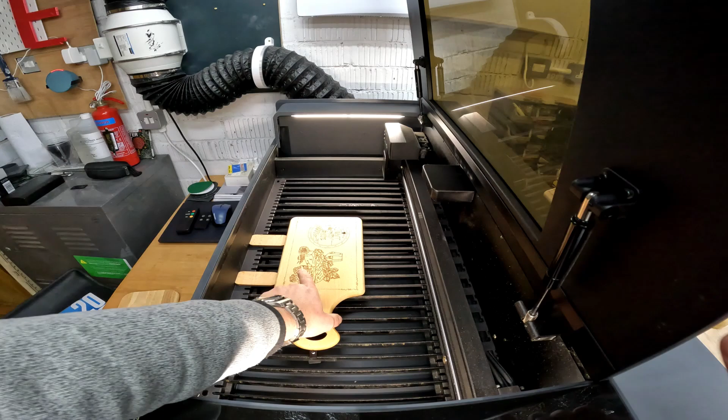Great. It's another cheese board finished for another customer. Don't worry, brie happy. Yeah, sounds good to me. Nice bit of brie.

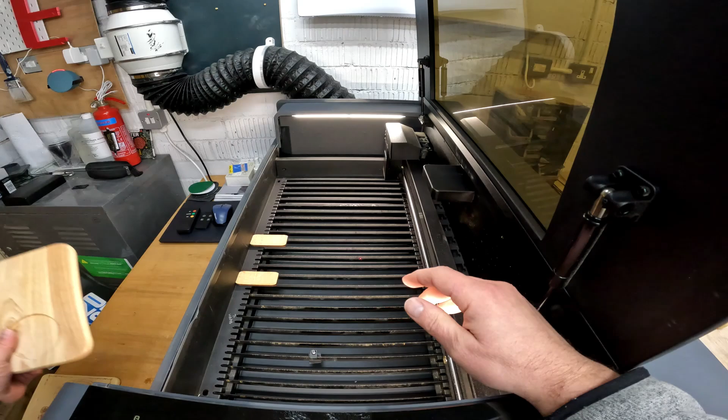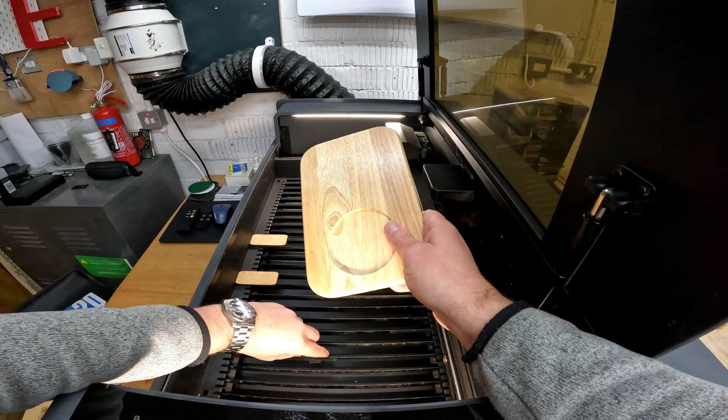Right, well now I've got about 6 of these to do. They're all exactly the same. The only problem is, every time I place them in, I can never put them in exactly the same place. The little clips that come from XTool, using the slats, aren't really designed to position things, they're more to hold things down when you're cutting them. And these little wooden pieces I cut out are okay for spacing, but again, no good for repeatability.

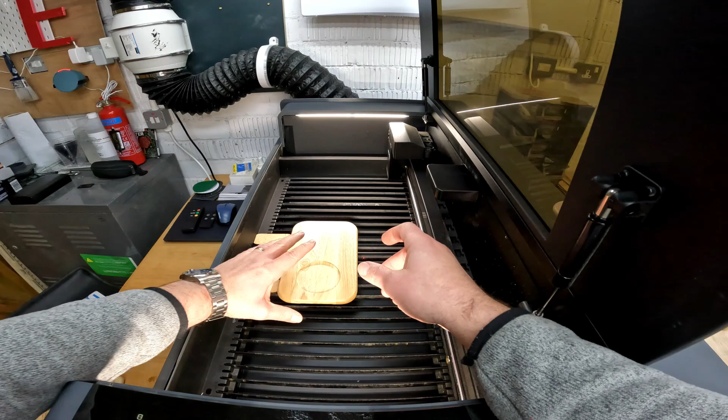So what I need to do is create something where I can put this in exactly the same position each time, so I don't need to realign the image for every single board that I'm engraving. So it'd be pretty cool if we could maybe design something in CAD, 3D print it, and then we could slot it in either between the slats or on top of the slats to align the block in the X and the Y axis, so we've got a repeatable position, so we only need to set it once, as opposed to multiple times that I'll have to do today.

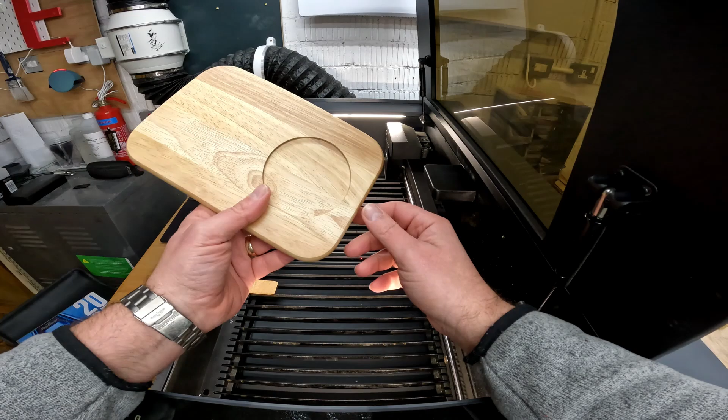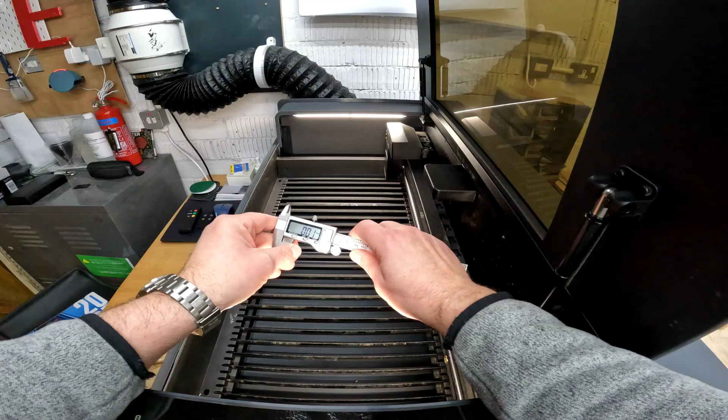So maybe I'll pause for a little bit in laser engraving and do a bit of CAD, but first I suppose I need to make some measurements. Right, okay, cool. So I've got my calipers. So how wide are these slats? Because I'd want something that sits over the top of these. Okay, so 5mm. Cool.

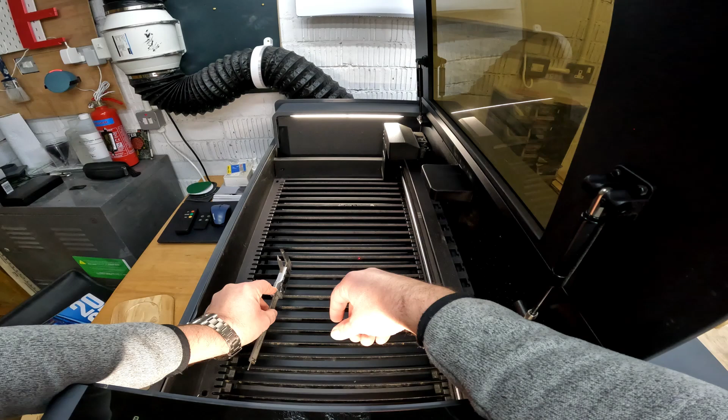Then the gap in between is, let's see, not very good for the camera. What's the gap in between? Oh, there we go. Gap in between is 20, 21. Oh, hang on. Oh, it's about 21.5.

So if we make something that's 21.5 that drops down between the slats, and then maybe spans 3 of the slats, so we've got something that we can butt up against that's not going to move, that's not going to wibble around, and then maybe something that we can put in this axis as well, so we can set the X and Y position of the board.

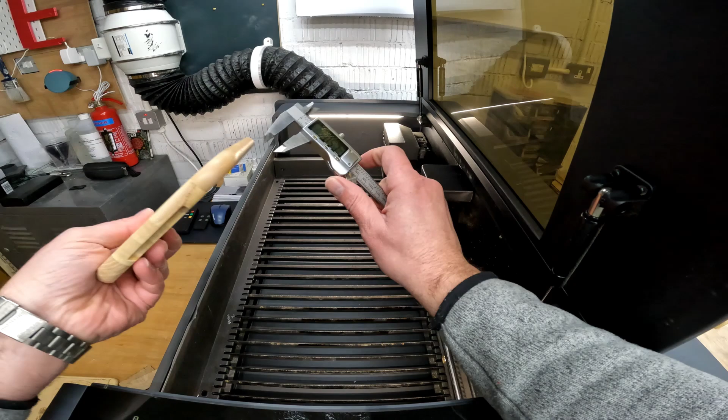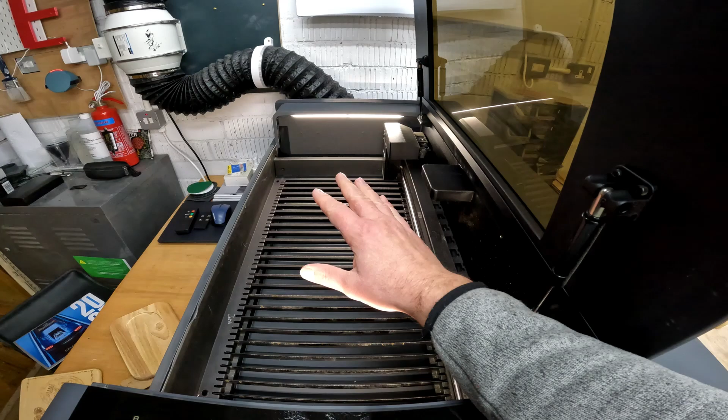So most of the boards that I make are around about 15mm. What's this one? So, yeah, 15.5. And this one, yeah, 15. So it's around about 15mm. So I want to be able to leave them in place, so it has to be lower than 15mm. I guess we'll give it a go and see what we can make.

Okay, so let's see if we can design something to make the process a little bit more repeatable, then when we do multiple boards, we can get everything lined up. So first thing, I'll make some sort of block for X alignment. I use Onshape to do my 3D CAD. One, because it's easy. Two, it's free. And then I use that with a Bambu Lab 3D printer. So you can see some of the things I've made in the past to aid the ventilation on the XTool laser cutter. So I'll create a new design in here.

And this isn't a how-to guide for Onshape. This is just the tool that I use, and there's probably better ways to do this. So let's go X axis alignment block. Okay. Right, so we've got the measurements. I think it was 5mm for the width of the slats. The gap between the slats is 21.5mm. So let's just make a simple block. I guess we want it to be fairly rigid, so if it can go into at least 2 of the gaps, then that'll remove its propensity to move around and wobble, because again we want repeatability.

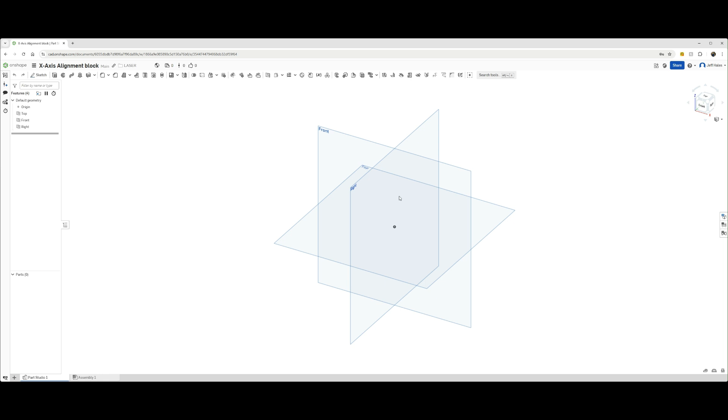So I'll create a sketch. I'll do it top down so it's easy for you to see what I'm doing. So we'll start off first and just create a rectangle. Now, a lot of the boards that I make are about 15mm high, so I don't want this to stand proud of the board. And maybe if we make it half the height of the board, that'll probably work pretty well. So we'll do it at 7.5mm high, and then it's 5mm for the slats, 21.5mm between the slats.

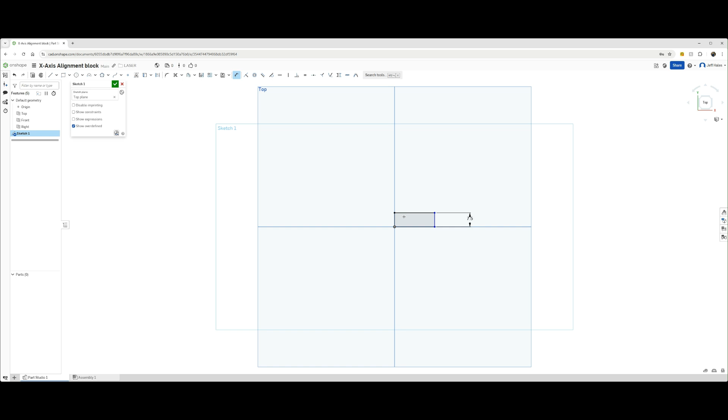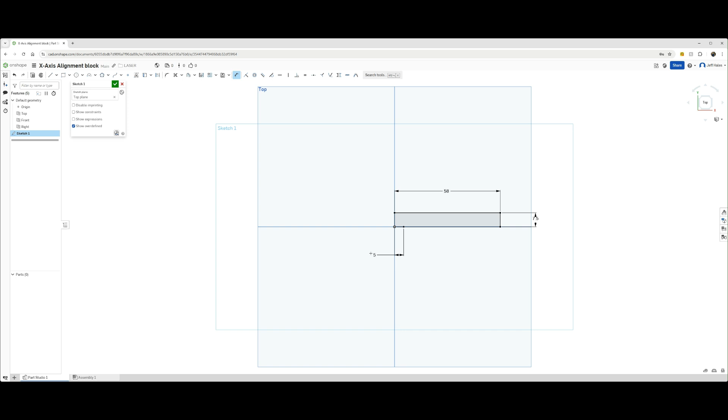So maybe if we do an overhang on either side of where it drops into the gap, so it'll be spanning 3 slats and then 2 legs, so 21.5 twice and 3 fives, so 58mm. Yeah, 58mm wide. Cool. Right, so just do a construction line now, and that'll be 5mm. So this will be where it overhangs. If you think about it, looking at it side on, this is where it overhangs the first slat by 5mm.

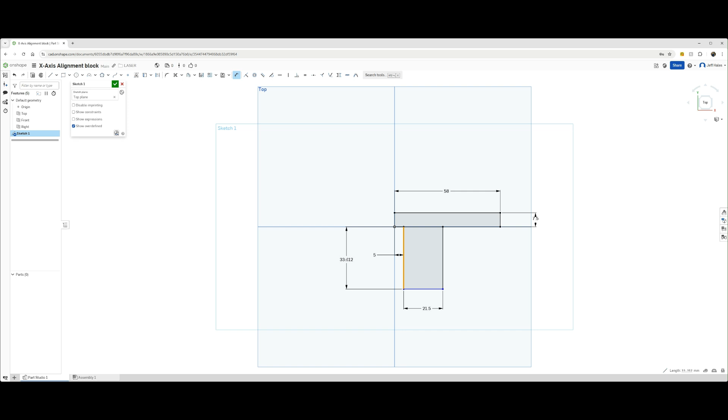Then have the leg that drops down between the slats. So that's obviously going to be 21.5mm. Want it to be nice and snug, no wobble about. And I guess we could do that 20mm, so 2 centimeters down. So that should give it some depth. I suppose it's just a little bit deeper than the slats.

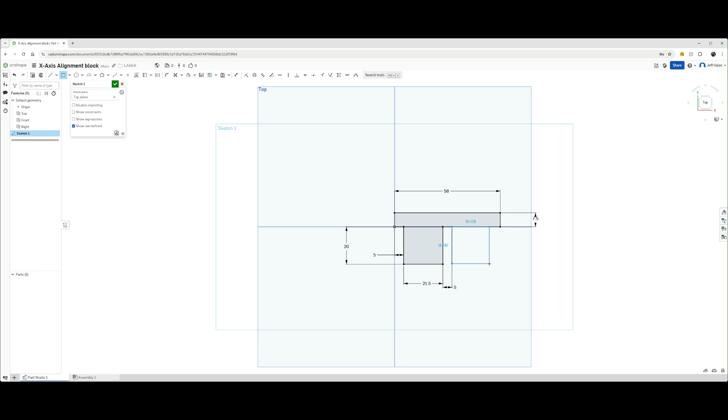And then we've got another construction line. It's another 5mm. And then we'll have another leg. That's 20. Oops. Dimension. It's 21.5 as well. Cool. And then hopefully, if we dimension this, yeah, that's 5mm. So it worked.

Okay, so I probably don't want to print this as a solid piece of plastic. It doesn't need to be particularly strong. It just needs to be rigid enough that it's not going to wobble about. And I don't want to use all of my 3D filament to print this, where it doesn't need any real structural strength. So I want to make this hollow.

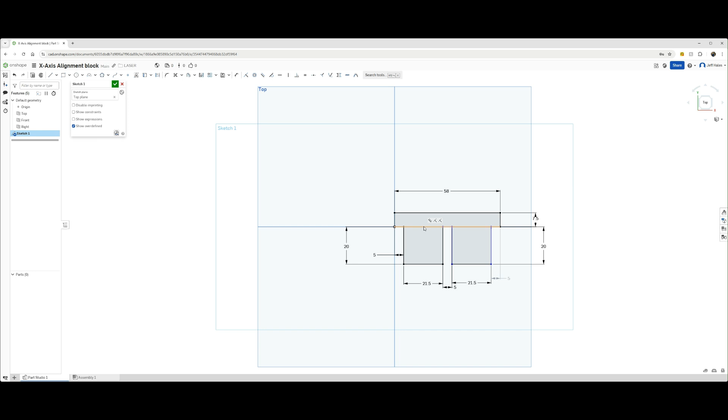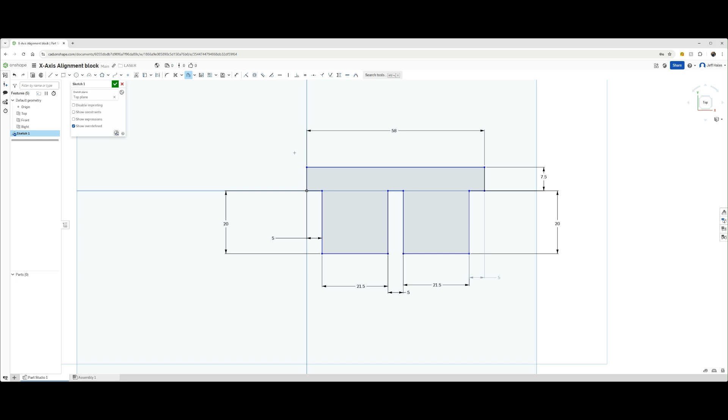So let's just remove some of these lines and tidy this up a little bit. Remove that as a construction line, make that a real line. Okay, so we can see now Onshape told us this is a contiguous line, so it showed up as a full object. Now what I want to do is go to the offset tool, highlight all of this, and I want to take that in 3mm.

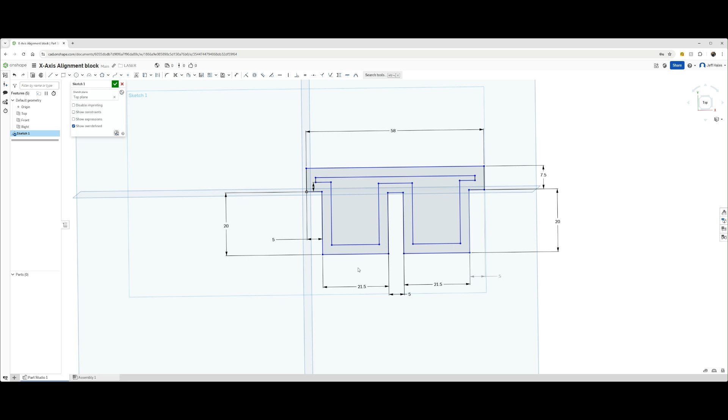Okay. So see what I'm doing here. I'm just making this a little bit hollow when I print it. So with 3D prints anyway, you get the perimeter, and then you get infill. You can get different infills. Normally I go for between 10 and 15% infill. But this way, I'm saving all this space here. So I think that looks good.

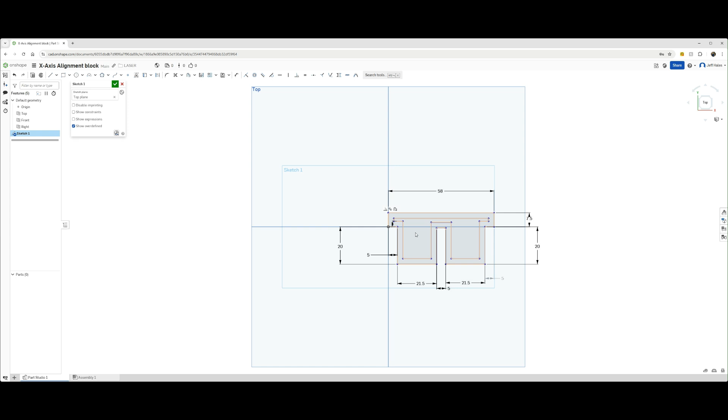What I want to do is just give it a little bit of strength. I'll do some internal fillets. 2mm internal fillets. I guess here as well. The edges of the slats at the top are pointed, so this shouldn't interfere. And then we'll do these bits as well. And I want to keep this face square. Okay, so that should do for the sketch.

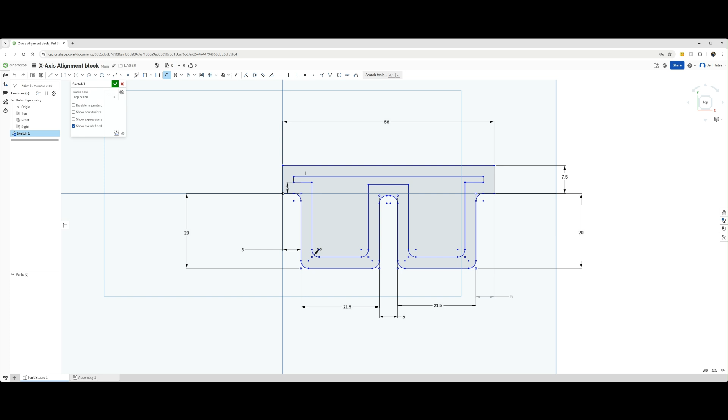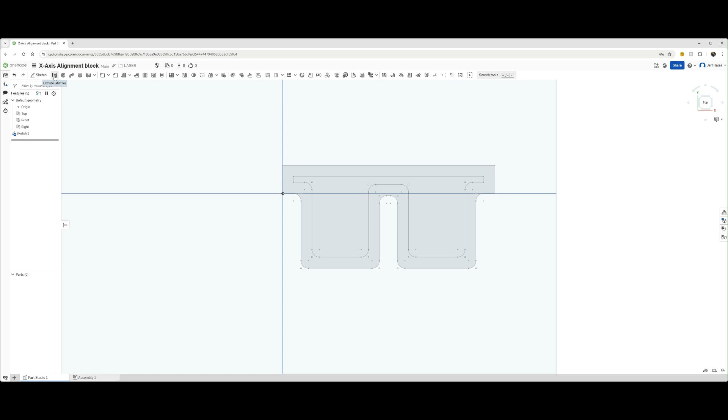And I guess now all I need to do is... actually, let's go back, just so it looks pleasing to the eye as well. Again, there's probably a better way to do this. Okay, cool. Right, so let's extrude it. We want it to be fairly chunky. We don't want things to wobble around on it. So let's do it as 5 centimeters, so extrude that by 50 millimeters.

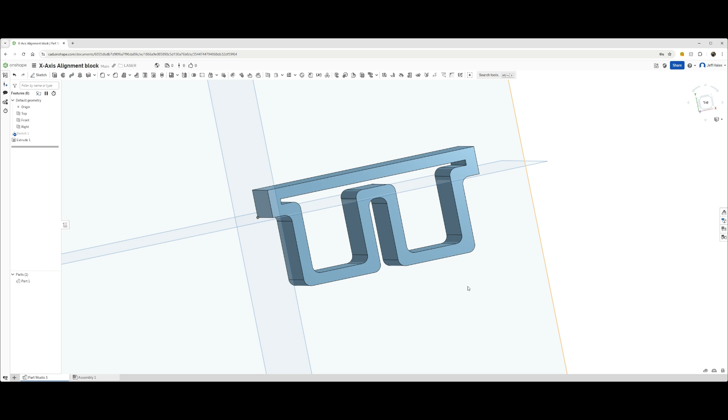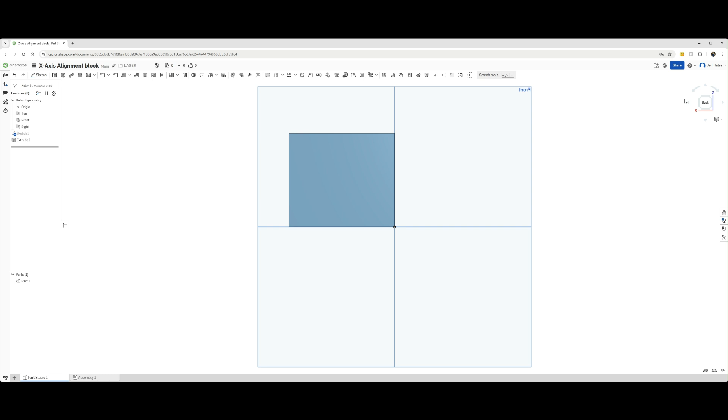Okay. So the idea is that this will just drop down into the slats, and then we've got a side there to reference off. And if I'm using this more than once, when I come back to it, I want to make sure that I'm always putting this block into the same gap. So I'll just put an arrow on this top face that I can then mark off on the laser, so I always put this block back in the same place.

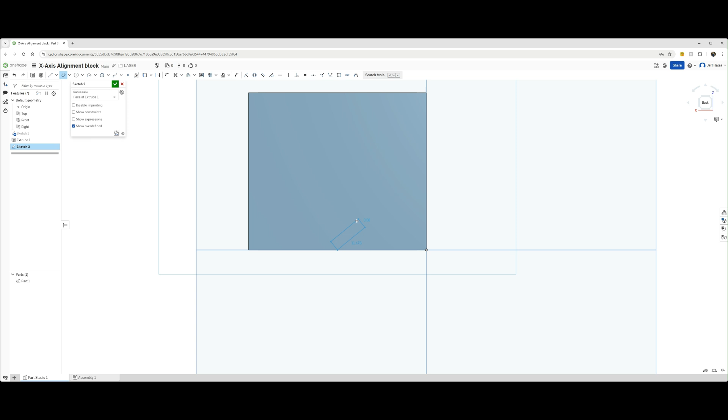So I create another sketch on the top, and we'll just make a little arrow. It's always good in Onshape that if you go along an edge, it'll show you where the center point is. There we go. And we can point the arrow there. So let's just dimension this. I guess 45 degrees. This is 2 millimeters, maybe. Yeah, nice.

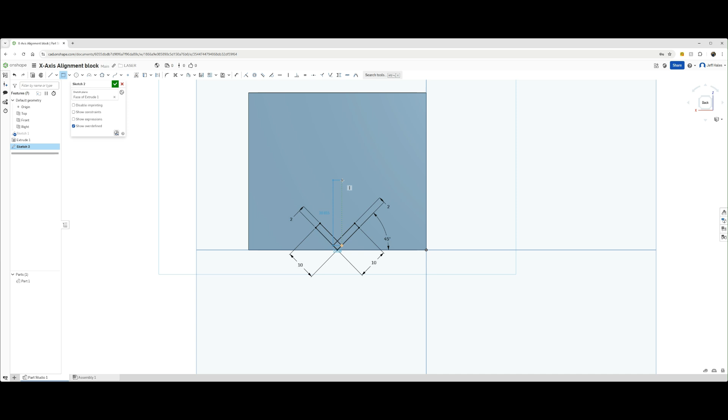Okay, create another one. This line. Oops, there we go. By 2. And I will just do an arrow there. Cool, that'll do. And now we'll just extrude that just a millimeter, I think. There we go. So I think that should do for the piece we want to make.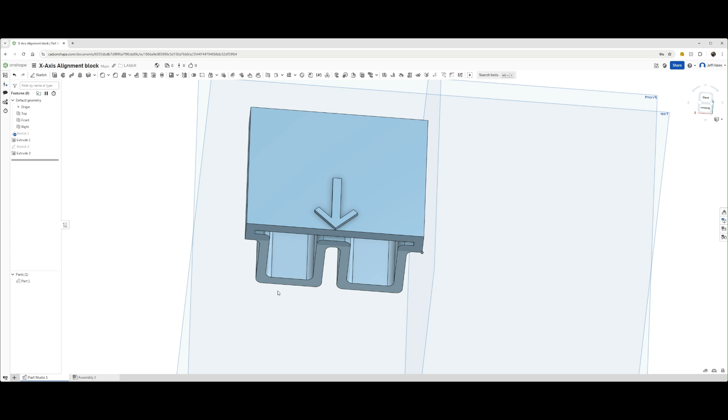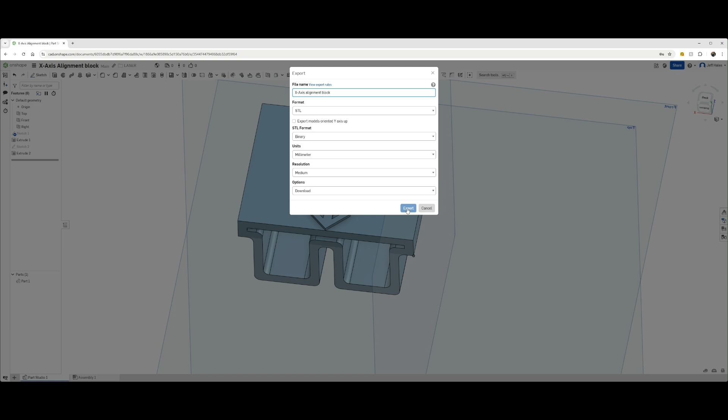Now, this will be good for the x-axis, but it'd probably be quite good if we can do something for the y-axis as well. So let's just export this, so I can put it into Bambu Lab later and print it out. So we'll call this the x-axis alignment block. Cool. Right, and now let's do a y-axis block.

Okay, so we've got the x-axis, let's make the y-axis. With the y-axis we want to make it wider and not as deep. So we probably want to make it at least twice as wide. In fact, yeah, we'll do twice as wide. So we'll make a copy of this one, so we're not starting from scratch again, and we'll just modify the x-axis.

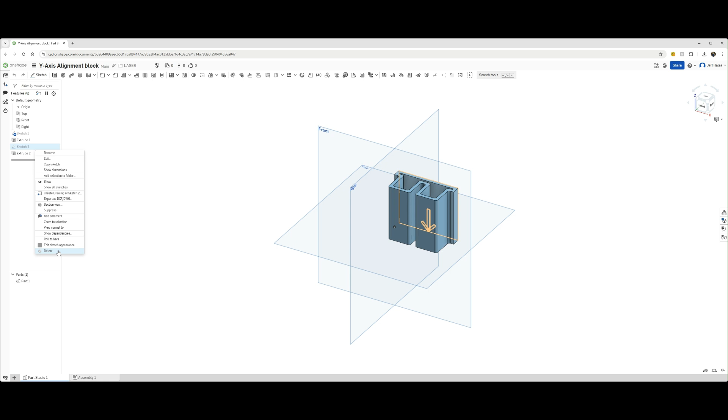Okay, so, okay, there we go. Right, okay, so let's modify this then. So probably need to do this. I'll edit this initial drawing. Now, how can we do this?

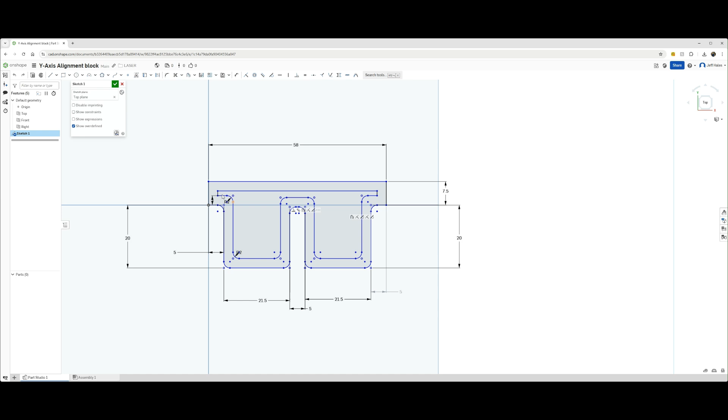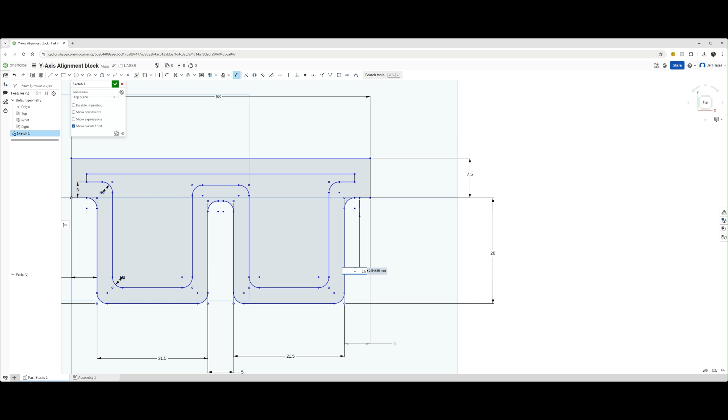Okay, so what we can do, we can mirror all of this and make it twice as wide. So that's fairly straightforward. So we've got 5 millimeter here overhang. So if we do a line, we'll take it. So if we make this 2.5 millimeters, that's cool. Now, what we need to do is mirror this. So we'll select the mirror line, which is here.

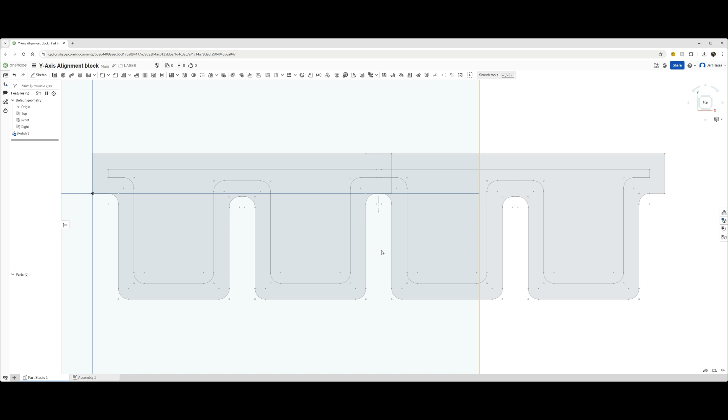Let's select all the pieces that we want to mirror. There we go. So we've now got one twice as wide, and all we need to do is a little bit of tidy up now. So we can get rid of this line, and we can just fill this in. So that should be it. We've got our, oh, hang on. Get rid of this line as well. Oh, we're done. Okay.

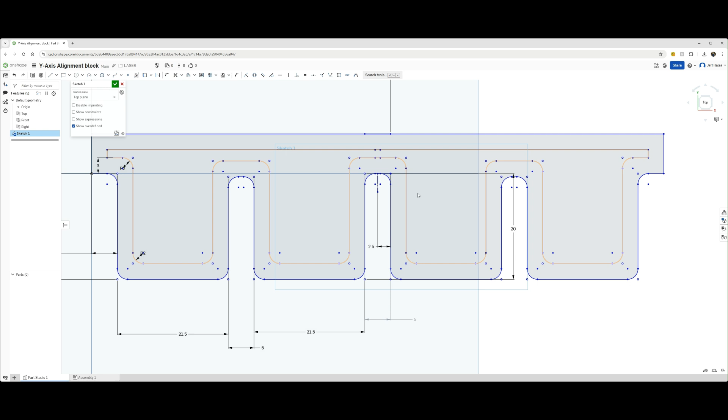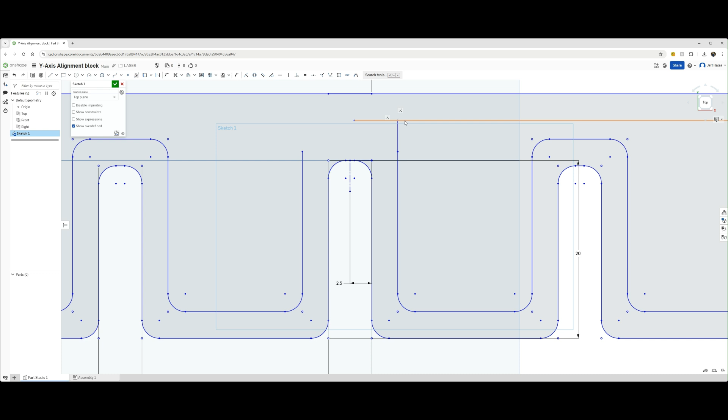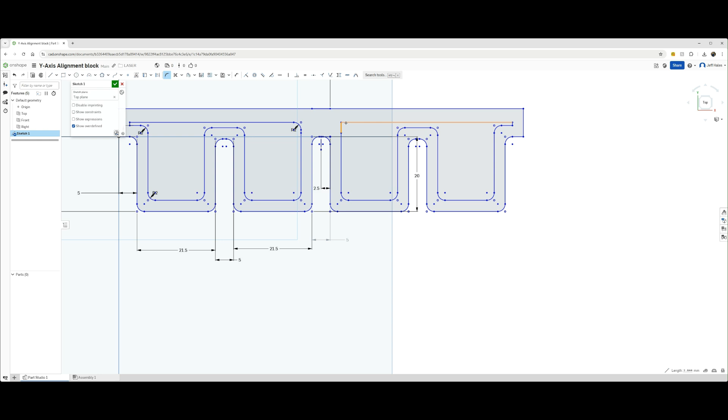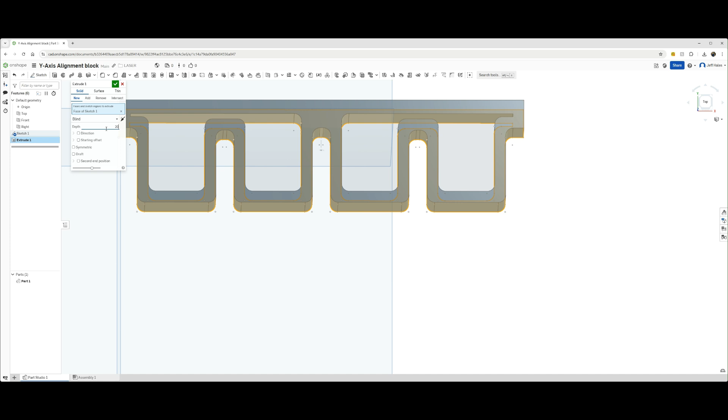So now we just need to extrude this. And again, we'll just do it at 20. Cool. Right, and let's do the same as what we did on the last one. I will just create an arrow on the top. So, new sketch, line, span the middle. There it is.

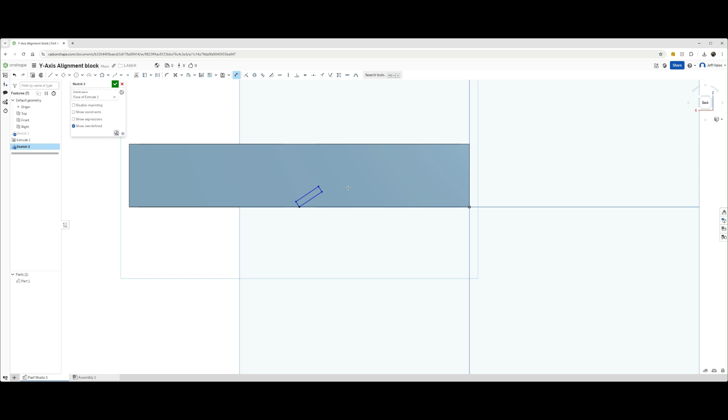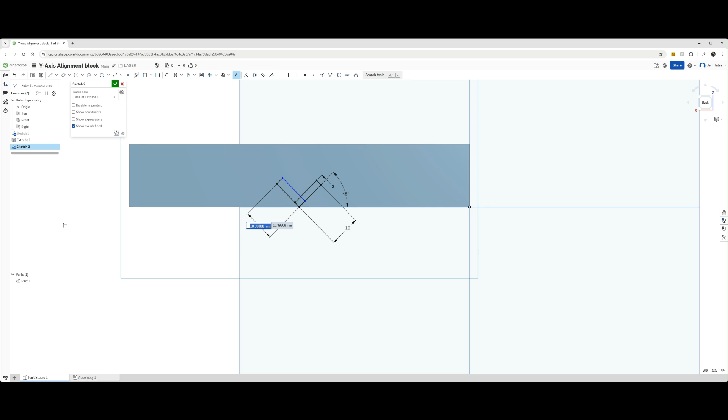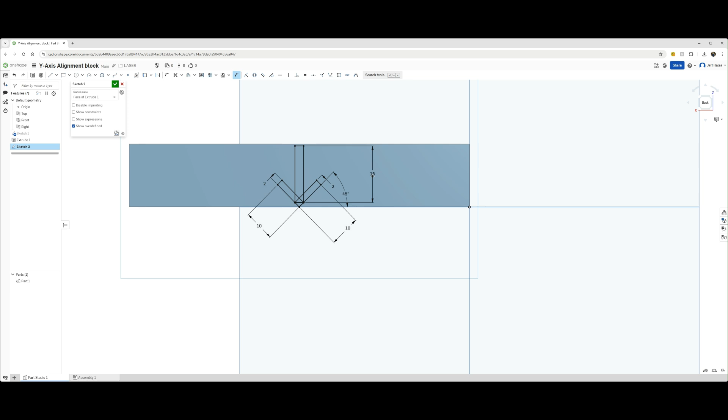Dimension it really quickly. 45, 10, 2, another one, same axis, go, 10, oops, 2. I'll just do, oops, there we are, just extrude that. Oops, easy. Okay, so that's the y-axis. So we'll just export that now.

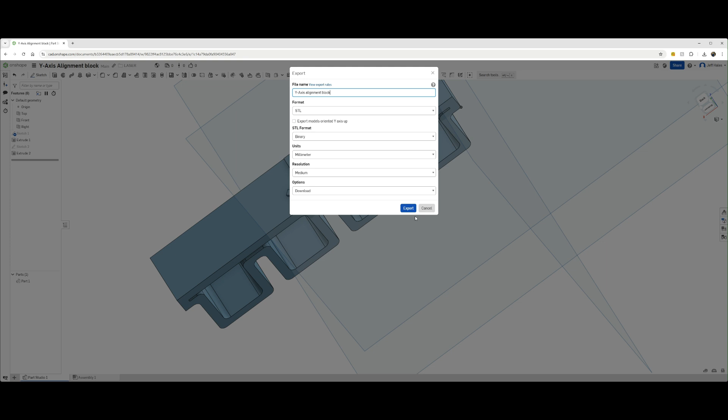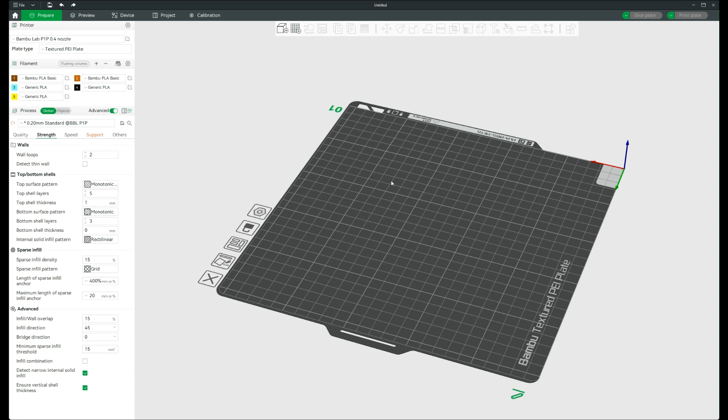Cool. Well, let's go and put these into Bambu Lab and start to print them. Okay, cool. So we've created the 2 alignment blocks. So let's make them. So I'm in Bambu Studio. I've got a Bambu Lab 3D printer that I'm going to create these on. I've just loaded it up with some Elegoo PLA. So we've got plenty of filament to make these. So let's just tidy it up. So that looks good to go.

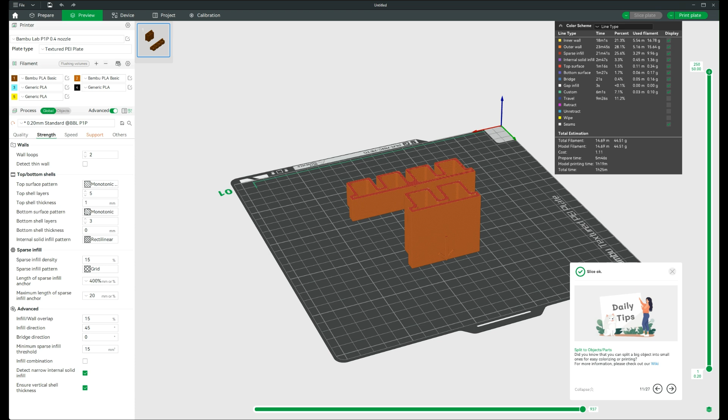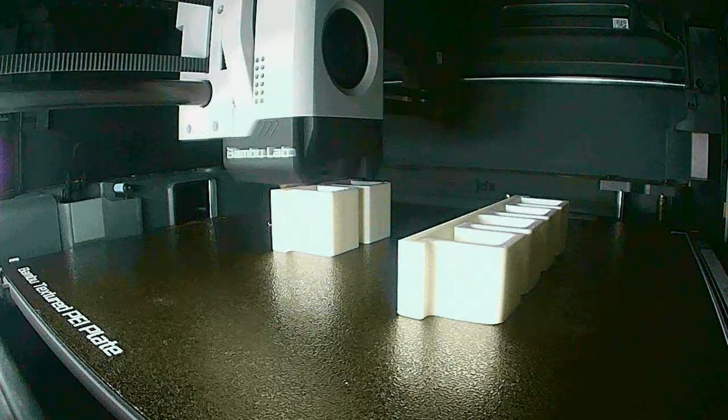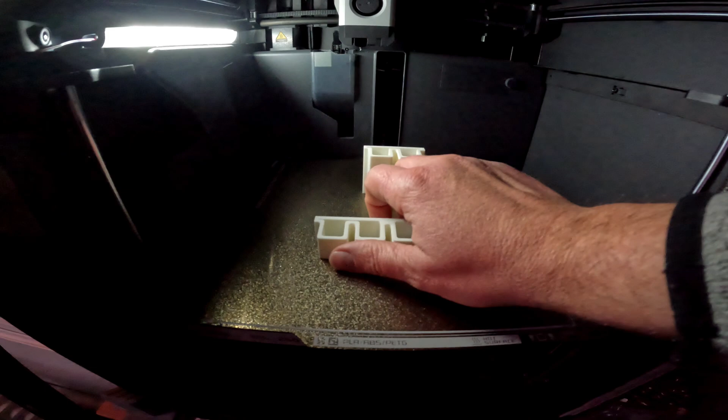So slice it. See if we've got any errors. No, looks good. Print it. We'll put the time lapse on so we can see them being built. And let's send the job and see how it comes out. So it looks like it's going to take an hour and 25 minutes. Well, all done. Look okay? Guess we should go and give them a try.

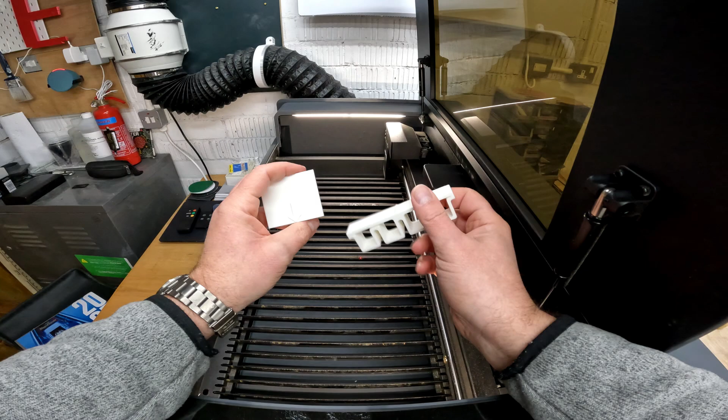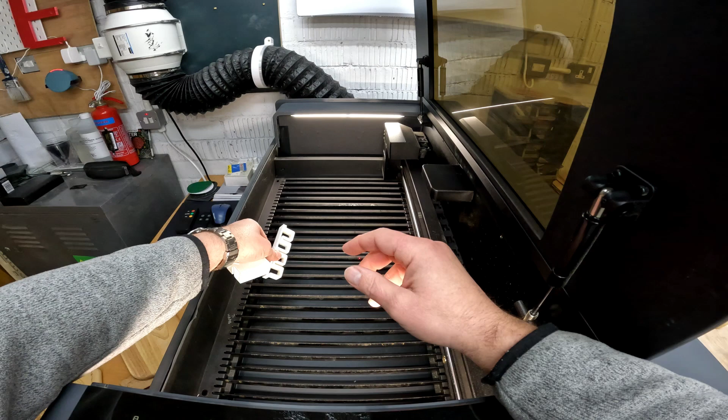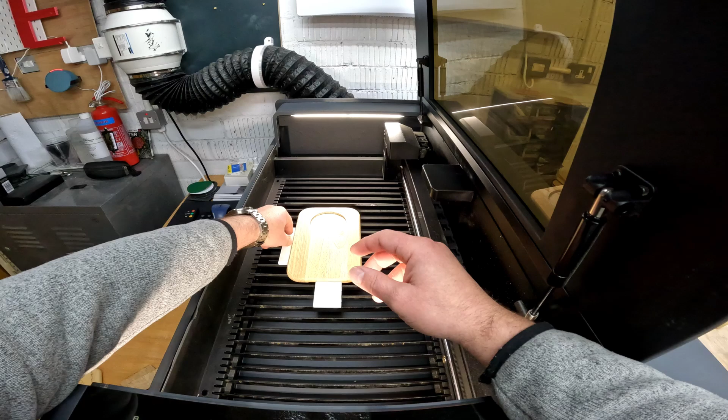Right, so we're back, and let's see. So, they look pretty good. Come straight off the bed, still slightly warm. Only slightly, it's pretty cold out today. And let's see, so first thing, does it fit? Oh, look at that, perfect. And then, okay, this might work. First, okay, that's a bit slippy, but maybe if we have it down here, which is normally where I'd engrave. Does that work?

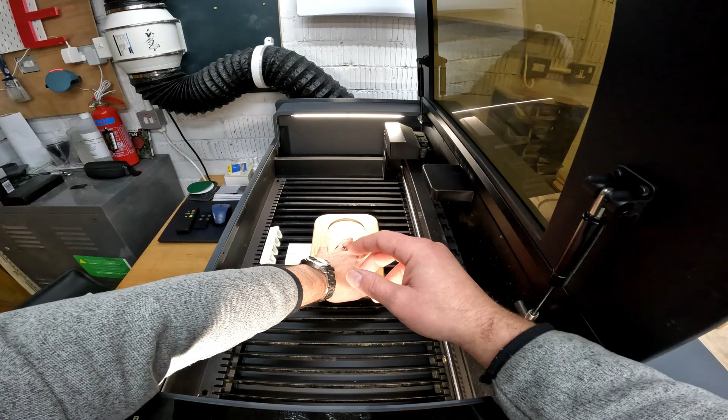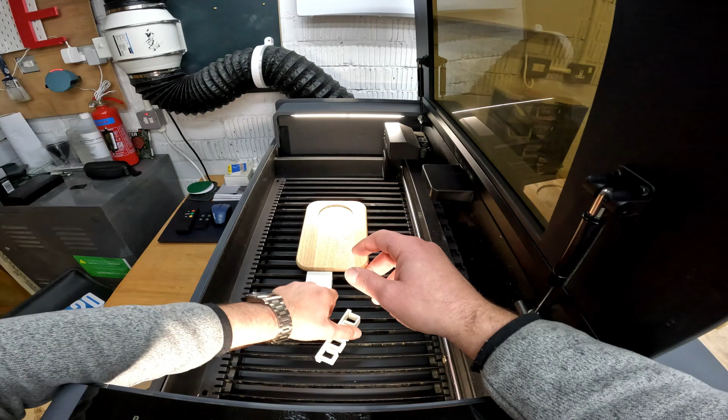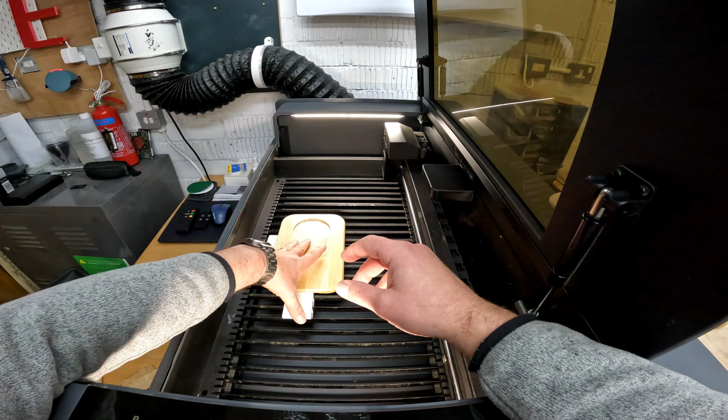Maybe. I don't think that's quite deep enough. So if we've got this one in place, yeah, that kind of slips up there. So I think this one is perfect. I think maybe we need to think about this one and how we can improve it. So perhaps reduce. Oh no, actually, nope. I think we're good. Yeah. So if we hold it in place, yeah, I think that's going to work.

I think maybe in version 2 of this, what we might do is extend this top part, so it sits on top of the shelf here, and that will stop it from canting over. But I think for now, as long as I'm careful when I put it in there, I think we should be good to go. Oh no, that doesn't fit. So I think we should be good to go with that. So I think that's it.